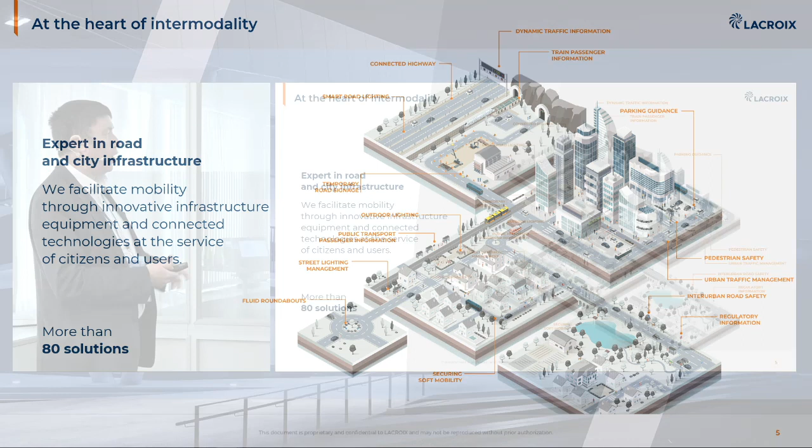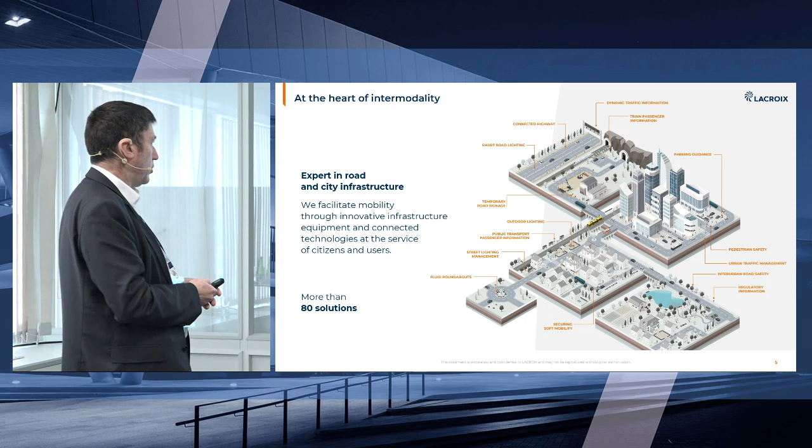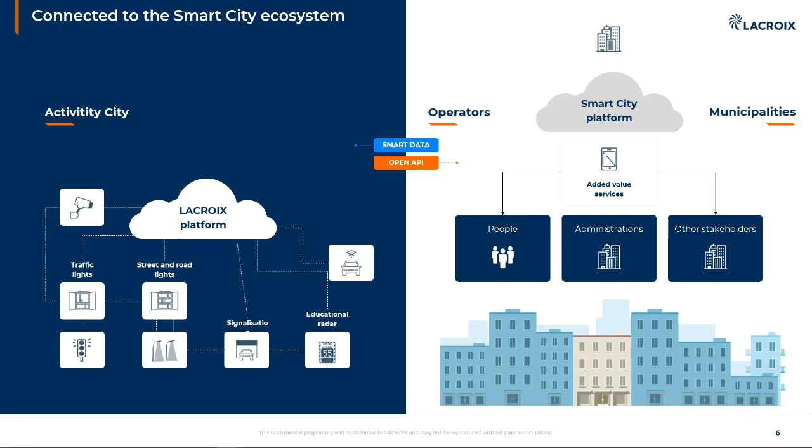And see what solutions we have already available. We are also developing our own platform, which will allow us to use multiple solutions to cooperate. For example, based on the traffic, we can change the lighting, or for buses or emergency vehicles, influence the traffic lights. But this is not part of the discussion today. And of course, this platform, when going to smart cities, has an open API to connect with the city platform, used not only for lighting or traffic lights, but also other types of solutions in a city.

As I said, we have in Lacroix City several divisions. The first one is street lighting, I will come back on the different products we are presenting today. Originally, Mr. Lacroix started the company in 1936 already. He doesn't live anymore, and the Lacroix family is not anymore the owner of the company, and it started just with simple traffic signs.

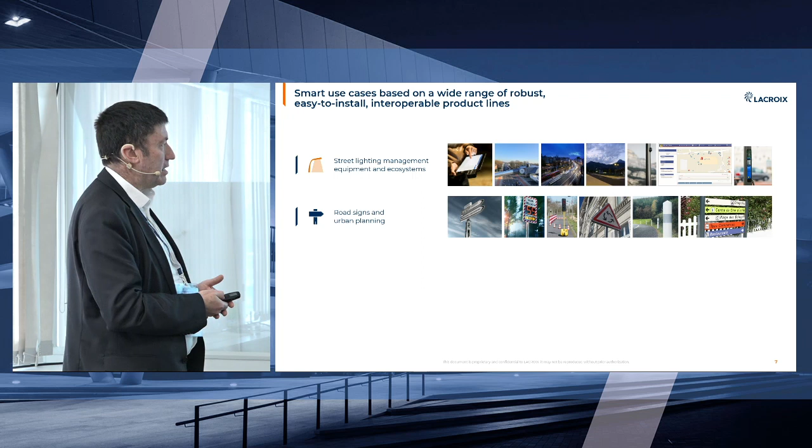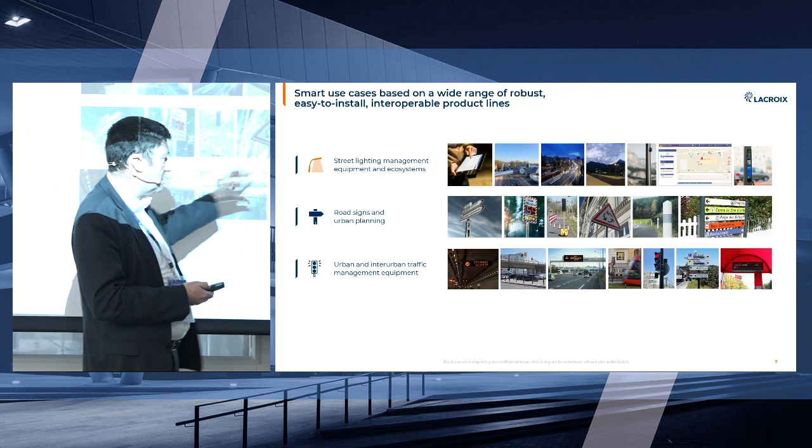So there we have the signs, variable message signs, and passenger information displays. We just have been awarded a 5 million euro project for Poland, for the national railways. With a new line there, modernizing all the passenger information displays will be delivered by Lacroix.

And of course, the second part is everything to do with intelligent traffic lights, where we also have a solution bringing AI. Based on video cameras, we identify how many cars, how many pedestrians, how many cyclists, if there are elderly people. And then we have our connected division built around V2X, the European standard for future autonomous cars, where we can already integrate and broadcast data to other users having V2X, or have live connecting data from roadworks to the signs on the highway.

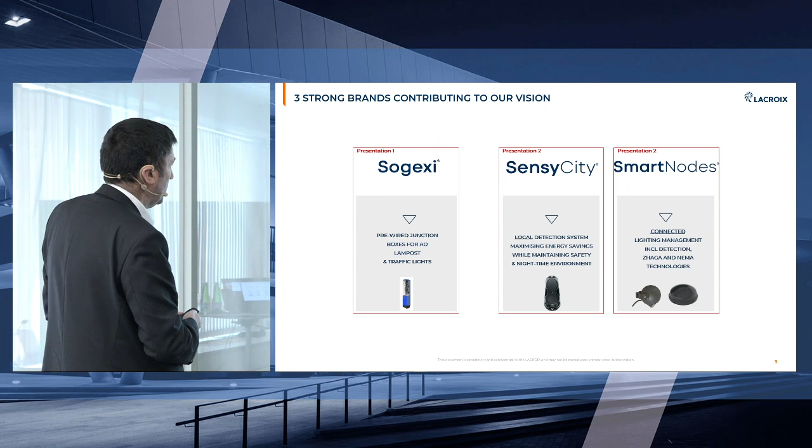But today we are talking about lighting. I have been offered the opportunity to have two presentations, one now and then one after the break. So I will start with the principle of junction boxes, I will come back on that. And then after the break, we are really going to our smart lighting solutions and smart light management solutions.

The first part, Lacroix, everything is on Lacroix but we keep using the brands. So Lacroix bought the company Sogexi, which is based nearby Lyon, about 7 or 8 years ago. And so now we are bringing the principle of junction boxes. It will become clear to you.

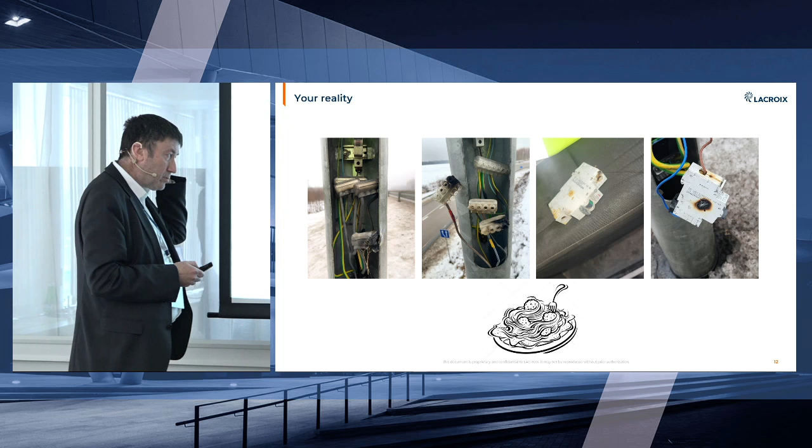I think some of you are familiar with these images. This is the way you install luminaires and lighting on light poles. I call it the spaghetti with meatballs solution. If you open a light pole, you see a lot of cables and a lot of components. If there is a problem, where is the problem?

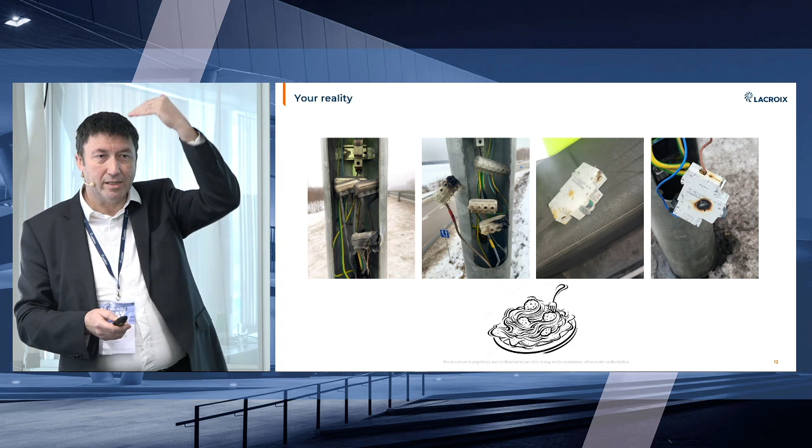And of course, all those components are IP20. Unfortunately, you're living in a country with very big temperature rises, which gives you a lot of condensation. And of course, condensation brings water inside the light pole. And of course, you have a problem sometimes - shortcuts, and bang, broken.

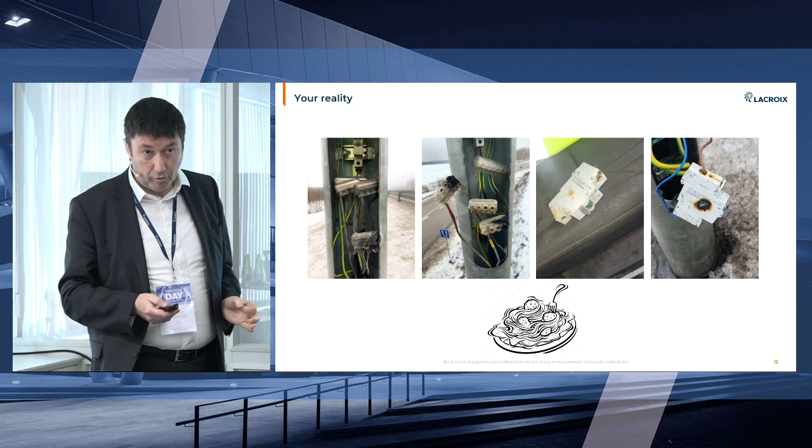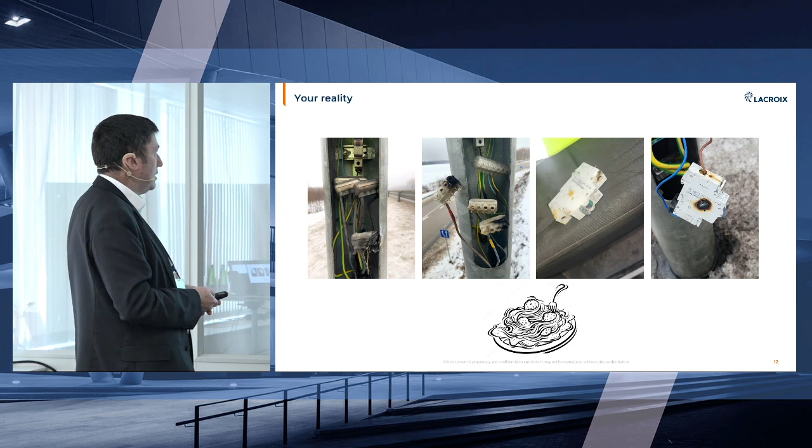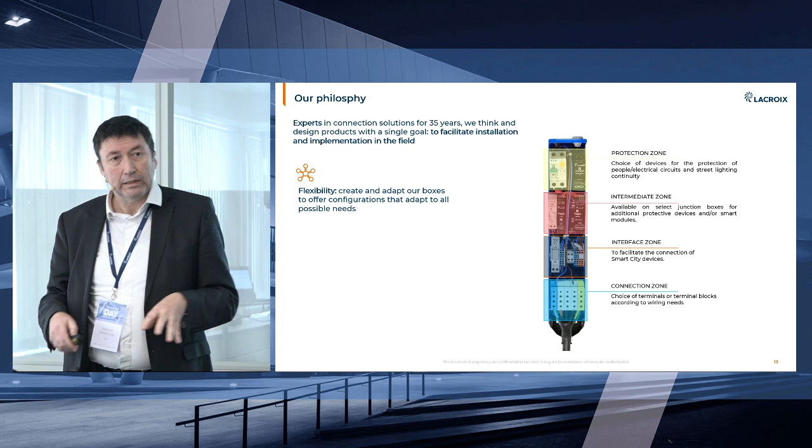So what is our philosophy? For 35 years already we have had this in place: bringing a box which moves from IP20 to IP44, and we even have an IP66 solution, to put all the electronics and connections inside the box.

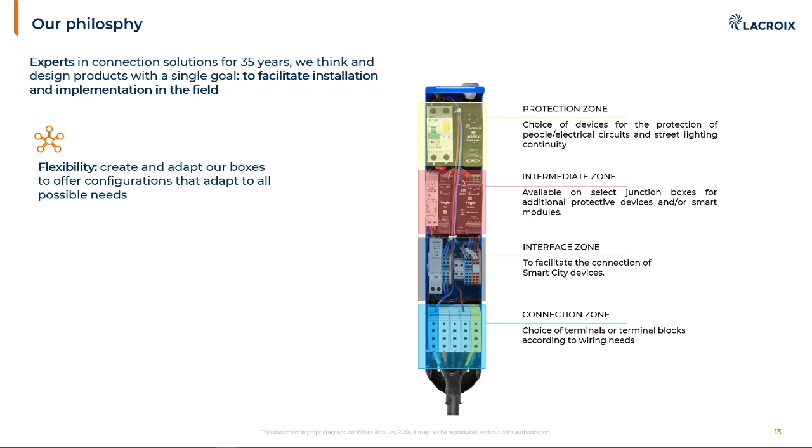That means if you have condensation, there will be water, and the water will go down and escape. If there might be some minor condensation inside, it will not, if you did a proper electronic fitting, cause what you have seen now. Of course, if there is lightning, that means you should have the right protection inside.

So we have it in different varieties. You will see different sizes depending on the light pole - very important, I will come back on that. Some have only 2 zones, some have more. This last one is the Europack, which is really used now for...

There is a trend to go to smart light poles. Cities want to add - where do you find electricity? All over the city, on a light pole. So they want to add publicity panels, air quality sensors, temperature sensors, traffic counting systems, cameras. It's a very good way to do it, but of course it brings the need for some extra protection to put inside the box.

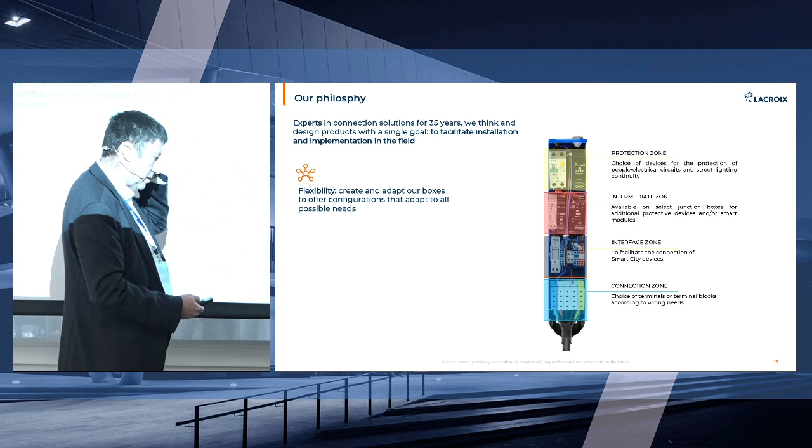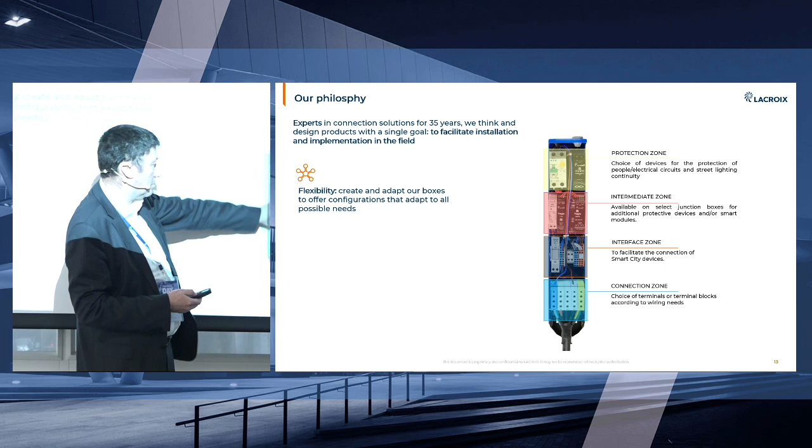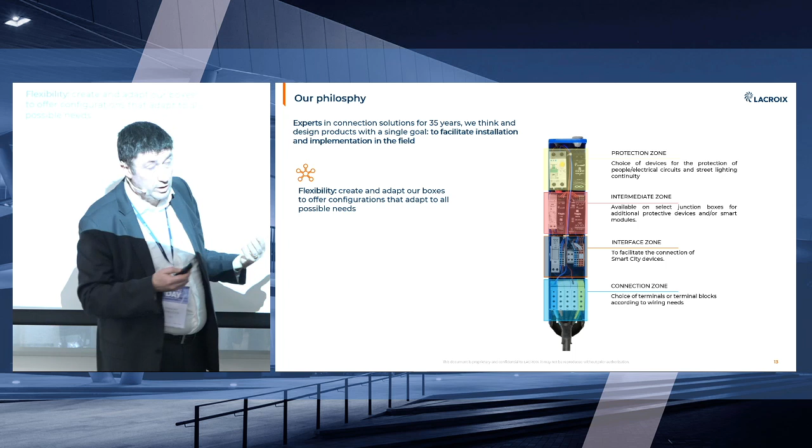And that's why we always have the connection part. The power cables come in from the bottom, it's connected, daisy chained to the next light pole, of course. And then part of the power is taken to feed, at the end, the luminaire, but also all the other equipment inside, including a lot of control equipment and protection of different types of devices, including luminaires attached to the light pole.

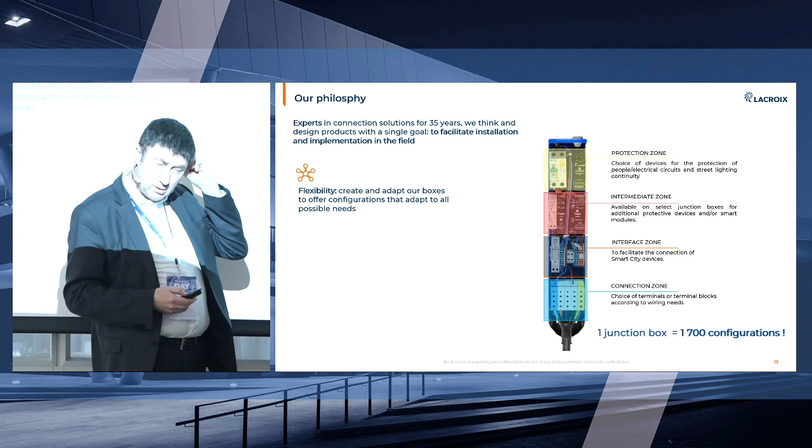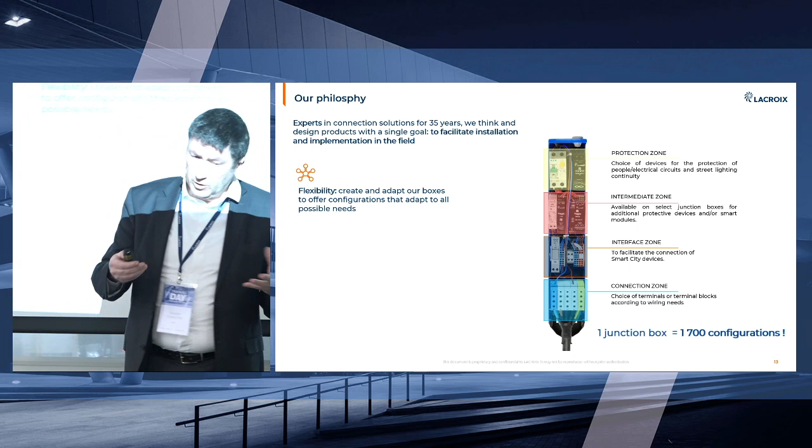So we have built, until now, very big quantities. In total, we have about 20 million of those boxes already installed in the world, in 1,700 configurations. So we can offer you a standard solution, but if you have used some special component...

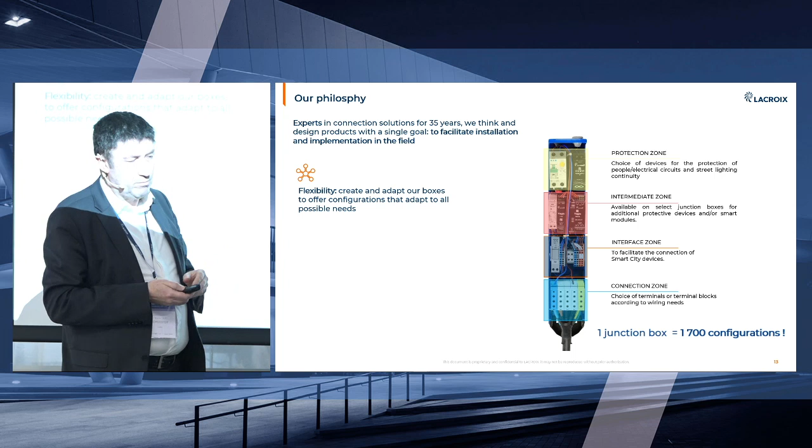We started to work with Lucidus last year, and we had the first small project where we used 2 boxes, because they had a very special driver to connect to 3 luminaires. But the light pole was too small - I will come back on that. So we put it in 2 boxes connected to each other. The lower box has all the protection, and the higher box, which is connected, has the special device to control the luminaires.

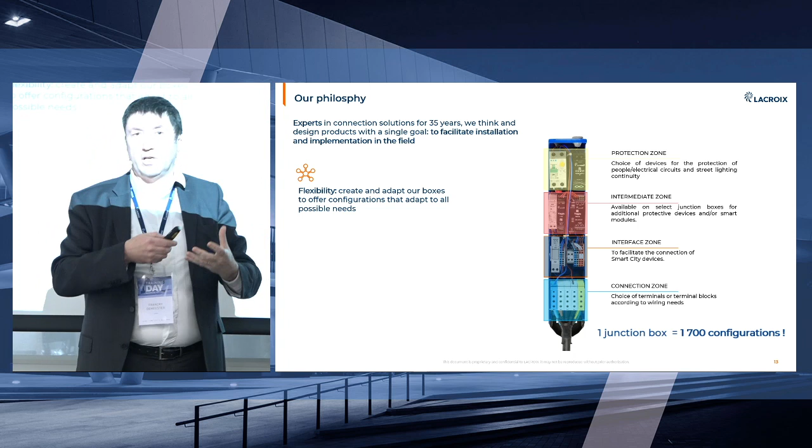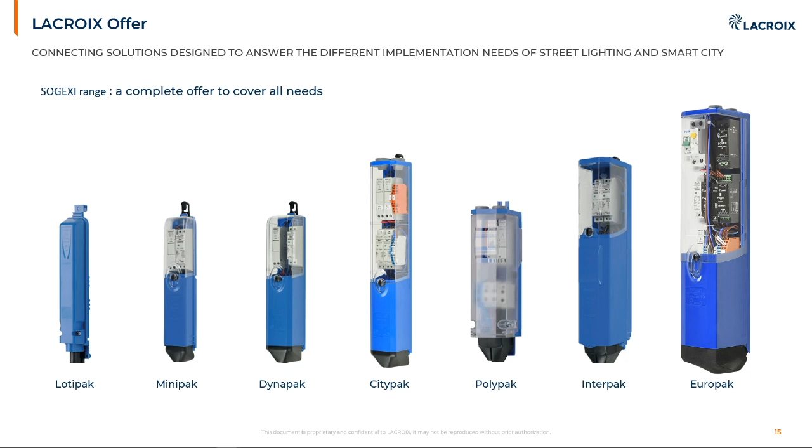Now, you see, we have it in all types of size and width, depending on what you want to put in, depending on whether you want automatic surge protectors or manual ones. This also comes, of course, with the dimension, and this defines the dimension of the box. So we have many different types, and it's up to us, to you, and to Lucidus to discuss what are your needs.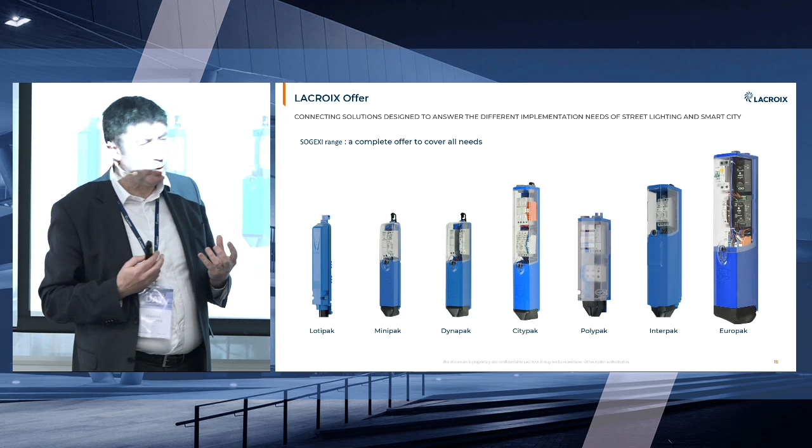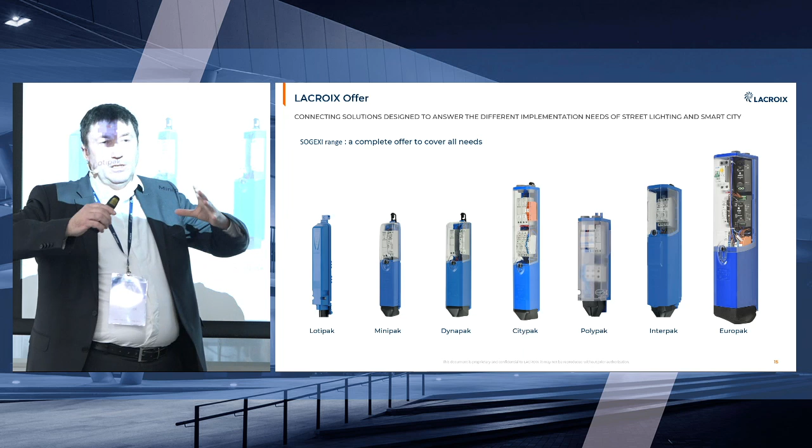For people considering it, it's slightly different than what you currently do as designers, because if you have a light pole, it's useful to think about what you want inside for protection. I often get, for example - I did a project in Finland for a new tramway, but the light poles were so small, we didn't get the box in.

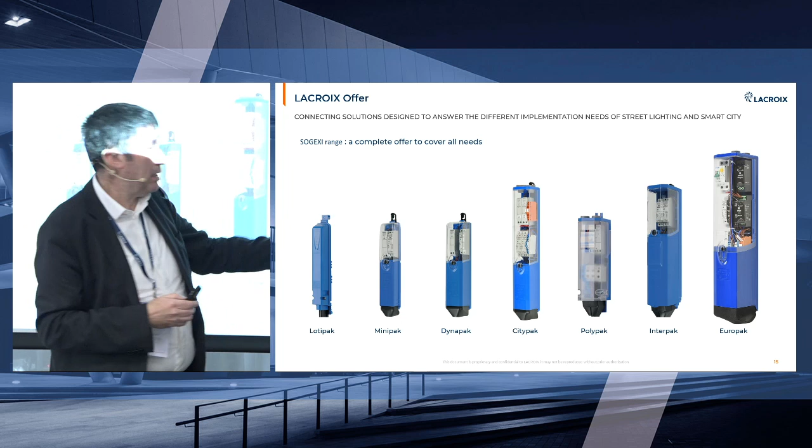So that's why you can specify it should be 10 centimeter, 12 centimeter diameter. It's important, if you want to use a smart light pole, to take into account what will be the dimension of the light pole, because based on the equipment, it comes with some type of dimension.

So what is very important is 3 different parameters. First of all, what is the inner diameter, because the box has to fit in. And of course, what is the door - there is a control window at the bottom of the light pole, 1 or sometimes 2. Of course, the height and the width, we have to be able to slide it in.

So this is an example. You can see them later on, so you can easily open them.

And then you can see here, of course, this opens too for the installation, but then there is a control window also inside where you can use it. But so it's very important - based on the light pole, we will be able to offer you different solutions, but it might offer you limitations to the type of equipment you can bring in.

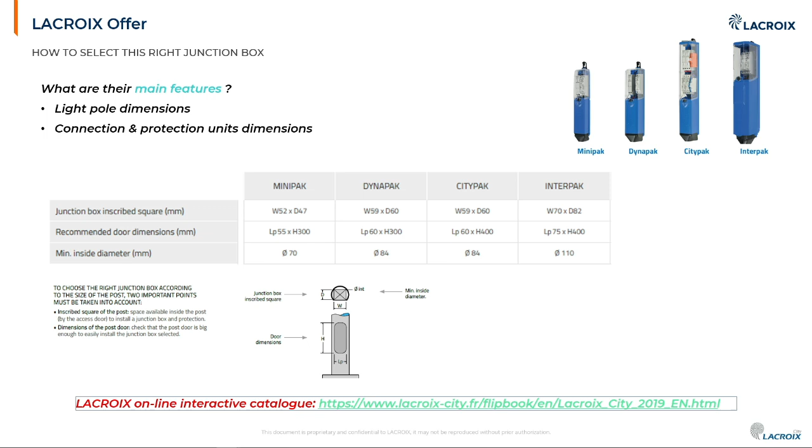So we have a very nice online interactive catalog. You can go to the internet, you will see all our offerings, and there you can learn a lot about junction boxes - it's very well specified. For example, one of the pages shows what we have - different products. You will see there is more than just street lighting boxes.

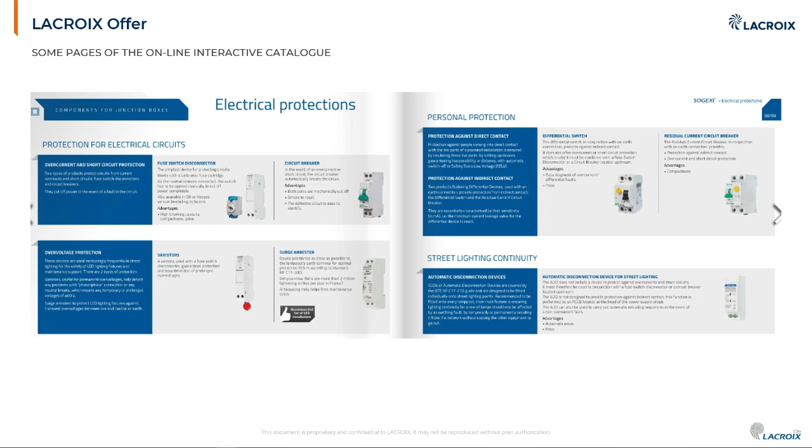Here you see the next page - it's difficult to read, but it's mainly the important point: what type of protection would you like to build in inside that box? Is it electrical circuits, personal protection? Is it against lightning? Or is it some special product? So all can be built in, but all, of course, comes with a dimension on depth and width. So this is all specified over here.

And then, for each of our products, there is a very nice product sheet where you can see what are the dimensions I need, what type of cables can I get in, can I get out, what type of connectors can I use, and also what type of protection can be built in. So if you say I want that, we also have the sheets reversed - if you say I need this type of protection, it will show you, then you can choose out of these boxes.

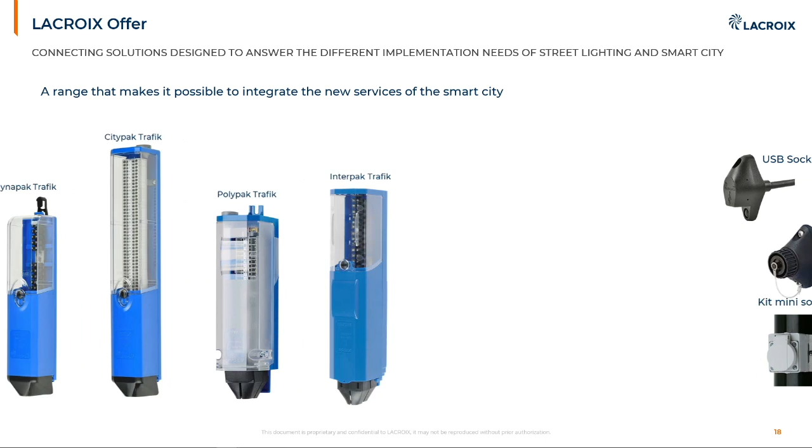So we not only have products for street lighting, but also this type of boxes are used, as I said, in Denmark and to the south of Europe, or used also for all types of traffic installations - being traffic lights, being tramways - where then we have different requirements, because then you need a lot of connectors. Sometimes it's 32 cables for a big junction. So this is on the traffic side.

And then, we also have some other products, which already are being installed in Latvia. This is our USB socket. That means you can install that on the light pole in the city center, and if somebody next to a bench wants to charge his smartphone and the city allows it, you can plug it in and take the power.

So this is one of the third-party services that we are offering. We have technology in which we can enable and disable it, and we can even measure the power that is used by the luminaire versus what would be used by this. Because for a streetlight manager, typically he is responsible in his budget for the streetlights, but he is not very keen to add all these third parties because they consume electricity and he gets the bill.

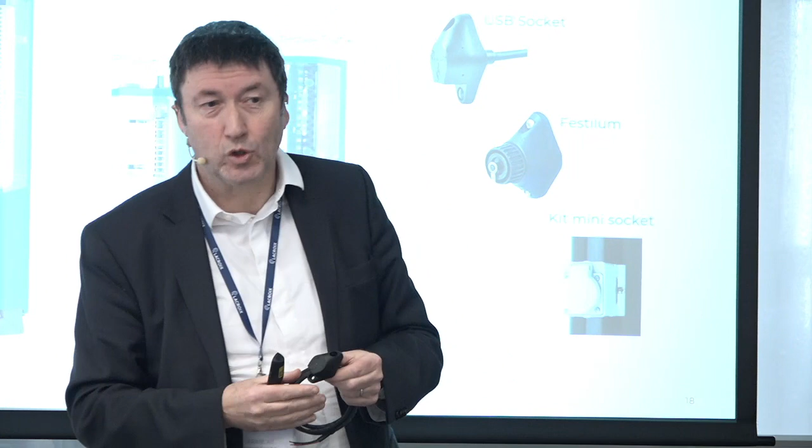So if the current trend is now electrical bike charging added to a light pole, this is, of course, consuming more. So we have other technologies to relay and cut the power between this and this time, and also to say how much was consumed by the streetlights and how much was consumed by the third-party solution.

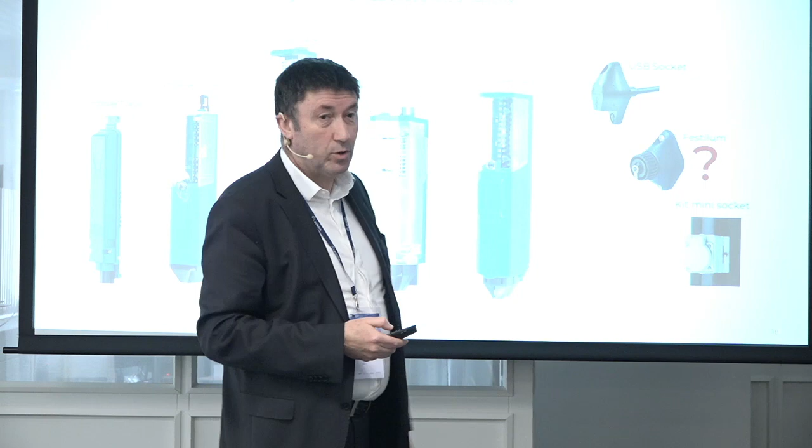And then we have the next component, which is what we call the Festilum. I think some people know it because I had last year a very big order from Estonia to sell that. So anybody has an idea - you have to mount it like that. This is in fact mounted on site, on the light pole. Okay, I have to screw it up.

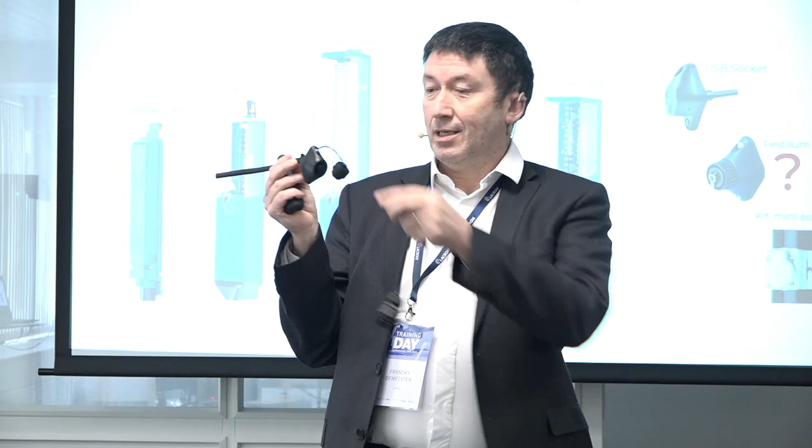Anyone have an idea what it is used for? And you're very fond of it - Christmas lighting, correct. It's a very nice system to have Christmas lighting. Thousands were sold in Estonia last year. You just mount that - during the year, you put on the cap, and then when Christmas is there, you mount this at the end of the cable from the Christmas lighting.

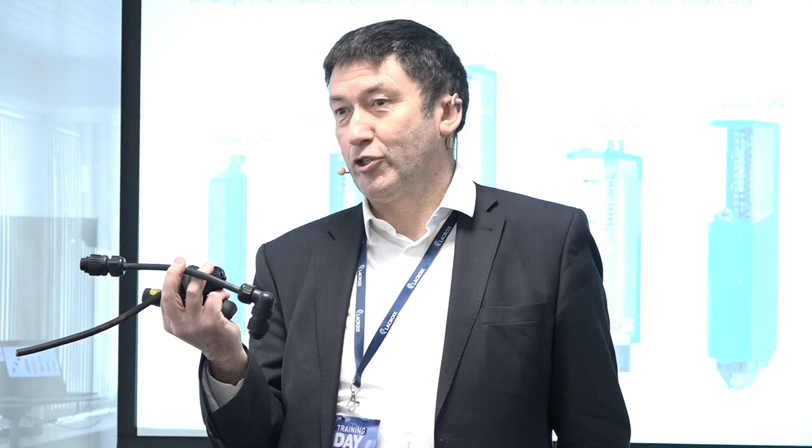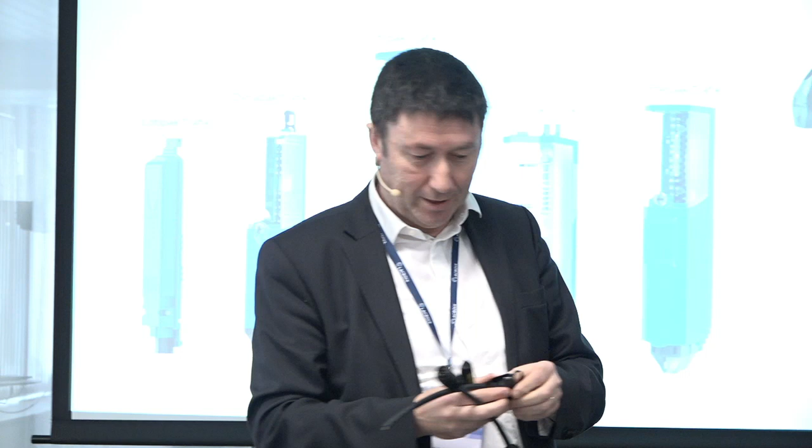And you have two versions - a straight version and a 90-degree version - and you just connect it. So during the year, I see sometimes very ugly constructions to attach Christmas lighting, but this is very convenient, and in your areas, it's very popular. I don't know why, but in Estonia, there are thousands of these being sold and installed.

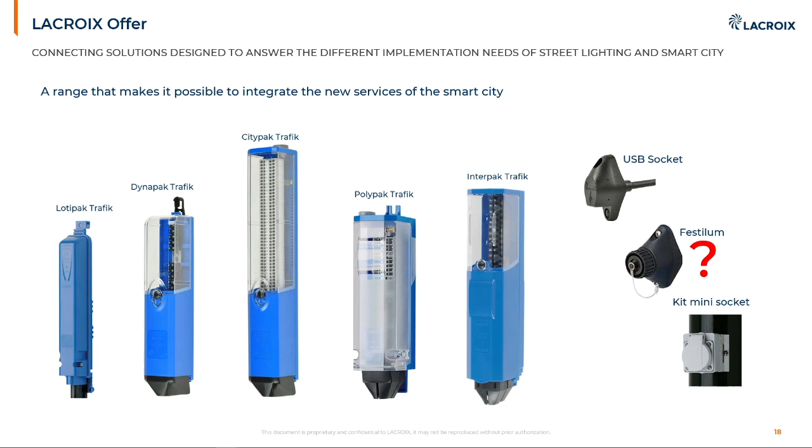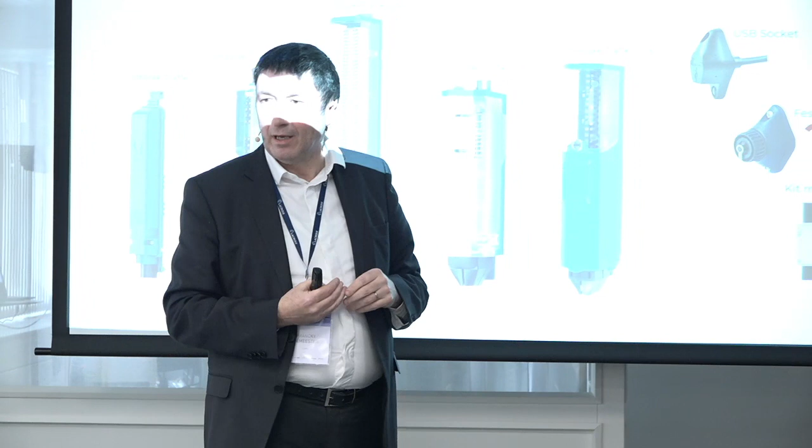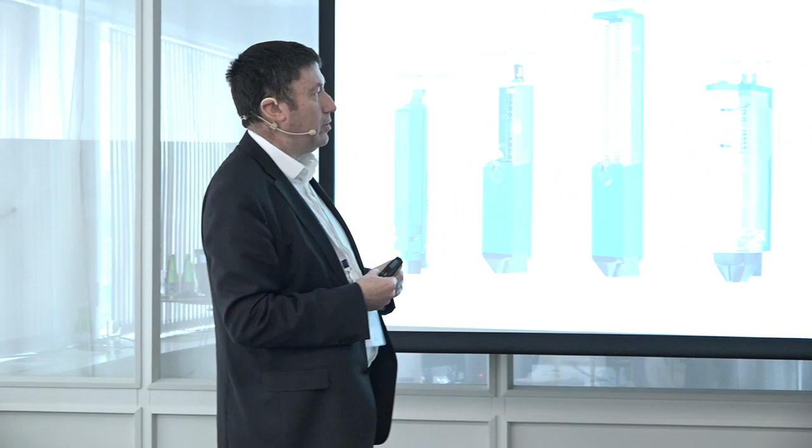And then also we have what is also used in your area a lot - what we call the mini socket. It's a kind of socket that you mount on a light pole, where it is possible. Let's say that's the old version for the Christmas lights, where you just plug in a standard Schuko or whatever plug inside. Of course, it's better like this - this is more watertight than the standard product we have with the mini socket. Of course, the mini socket allows other things too - if you would like to have a traffic camera, for example, you could connect it for power.

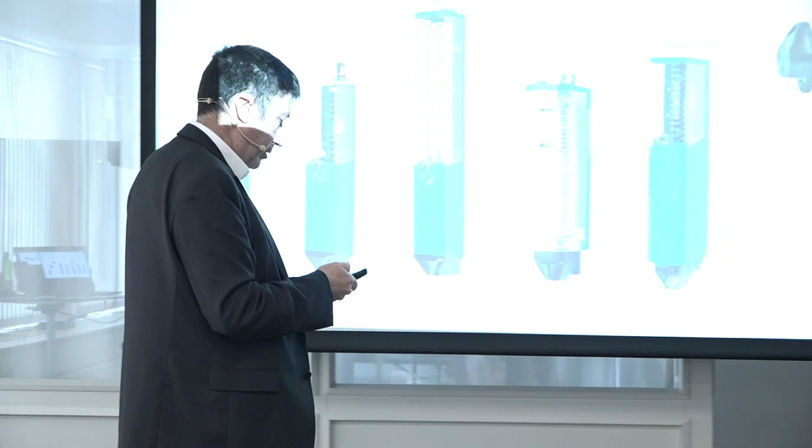I think I went a little bit fast.

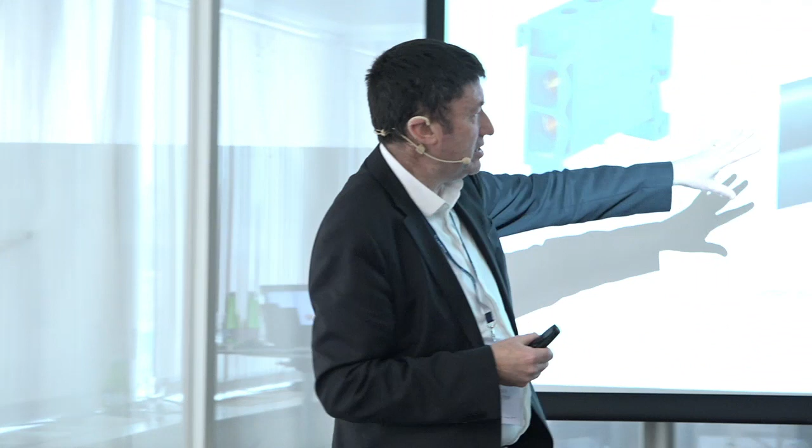Not only do we have the boxes, we also have different types of connectors based on the cables you're using, from 10 square millimeters up to 35, also 50 is possible. We have different connectors where the power cables come in, partially daisy-chained to the next light pole, with part of the power taken off. We developed a technology that electricians don't always like, but it's very secure, unlike clip-in solutions where you're uncertain about the contact. For the different cables we have different connections, and then this goes out.

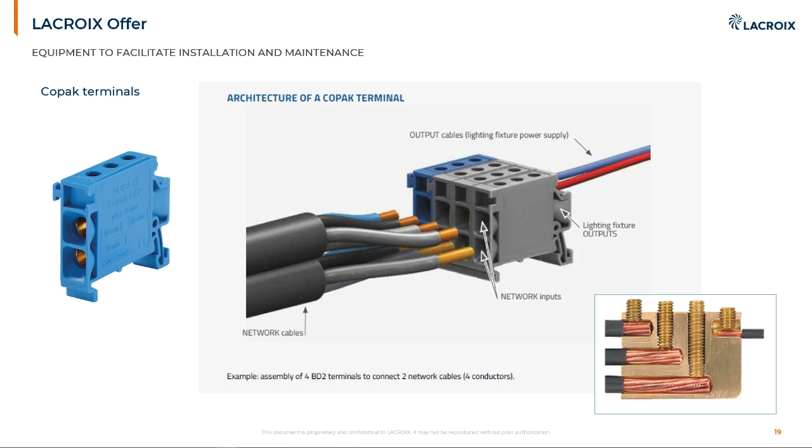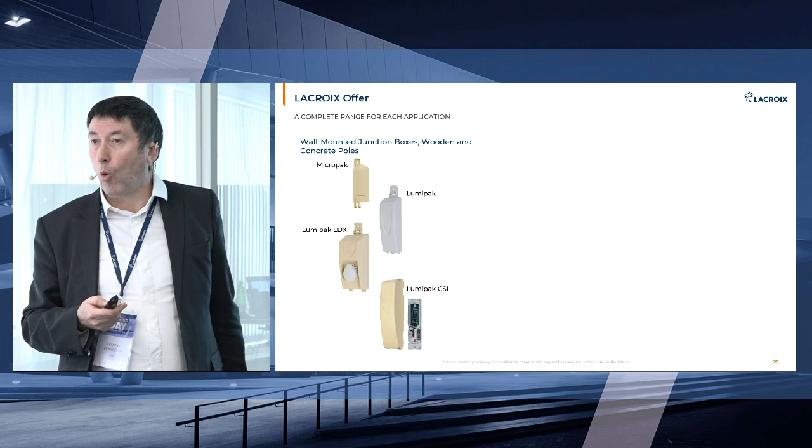We also have a solution if you would have wall-mounted lighting. Sometimes in the city not all lights are mounted on a light pole - sometimes they are mounted on a wall. So we also have a solution there where you fix it to the wall, and then again you put the power cables and branch it to the luminaire.

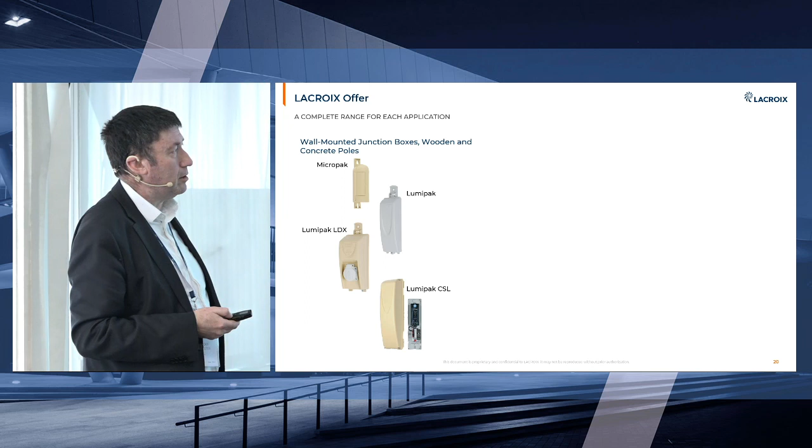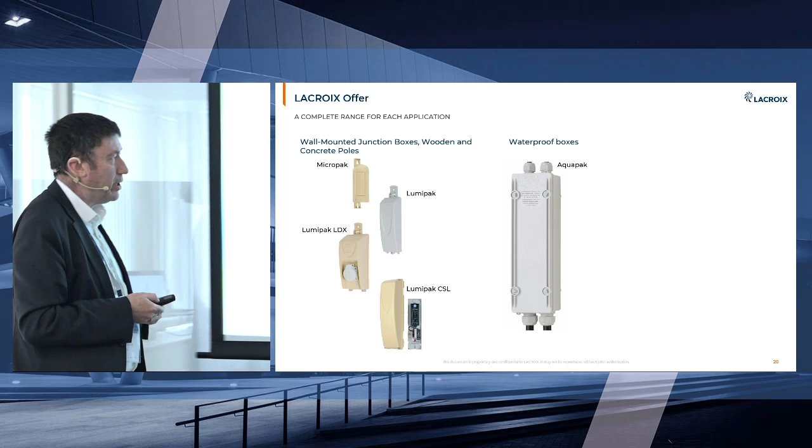We really want to facilitate installation first and foremost, because this comes completely pre-wired from our factory. The only thing you have to do is put on the power cables and connect the luminaires or other equipment you'd like to attach - traffic camera, traffic counting device, light panel, or electrical vehicle charging installation. This is all pre-equipped, so you save a lot of time not having to go on site and do all the wiring.

Of course it's also done on a production line, so we have our own test benches. When the box has been completely assembled, it's powered, and a computer program checks that what comes out is what you expect when you put in power. And then of course it's delivered.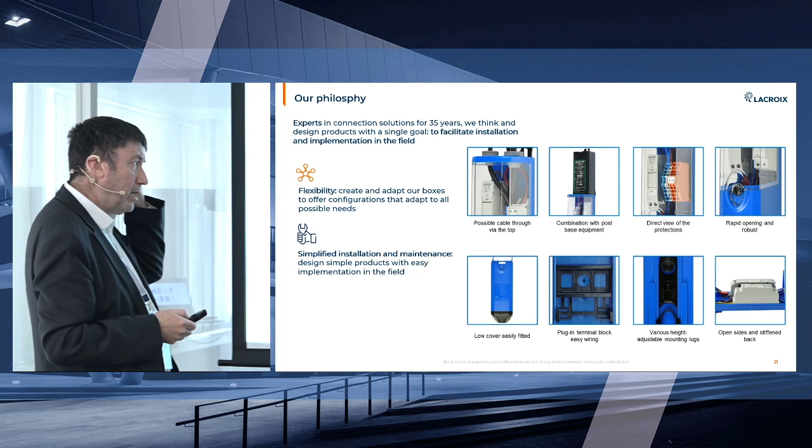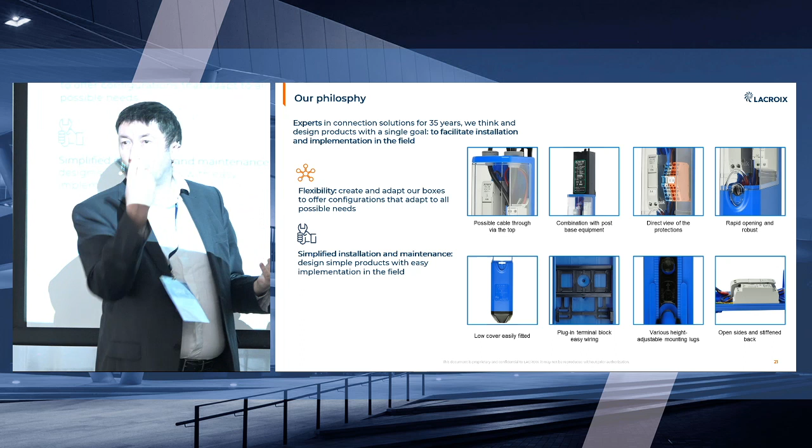Now, the problem is sometimes the electrical components - with the crisis, some components depending on the solution you're selecting might take some time to get awarded. We can put cables via the top or via the bottom to go out, though normally all power cables come in from the bottom. We can combine it with other equipment, and we have our own drivers - for some installations, the driver can even be programmed with an app.

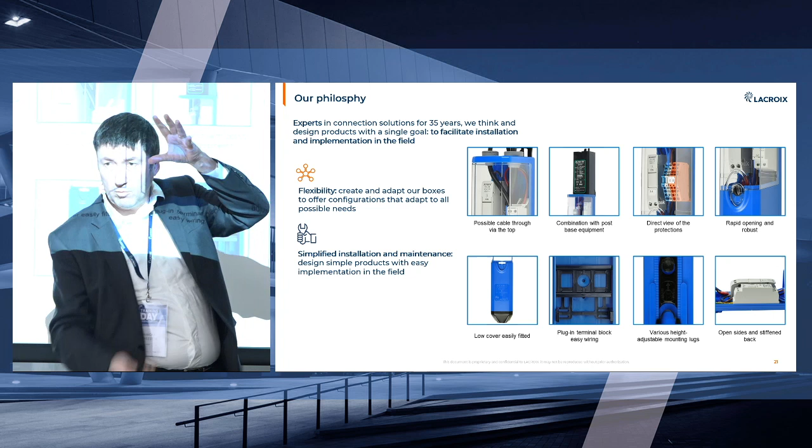You see that we have this transparent cover. Some are more than the others. We even have a possibility, but people like it, but only few people buy it, to have a full transparent cover. But it's more expensive.

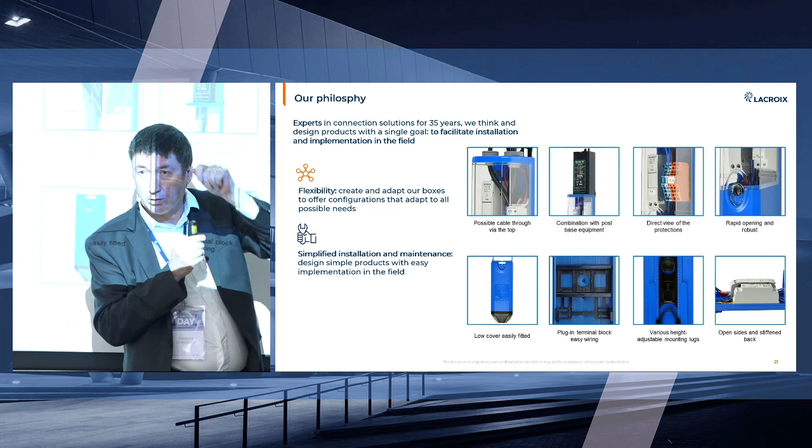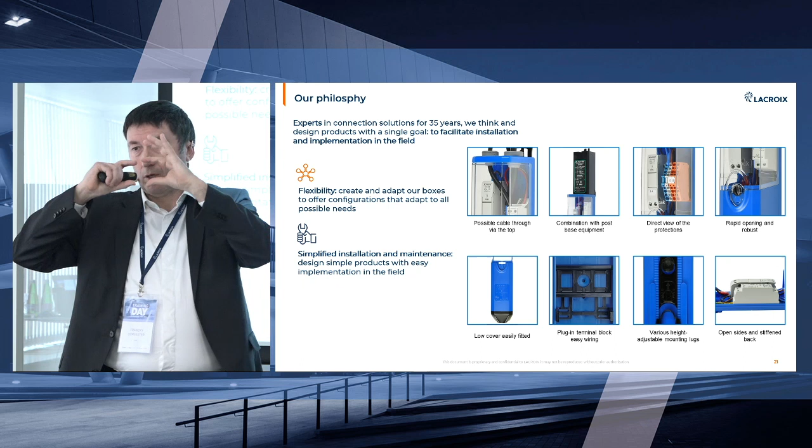So then people, mainly we have the transparent parts where really you have to work if there is a problem. But as I said, having it mounted, you will see, in every light pole here, also in the Baltic area, you have what they call a DIN rail. So it's connected to any DIN rail, which means your light poles are already prepared to use it, if of course they have the right dimension and the right opening.

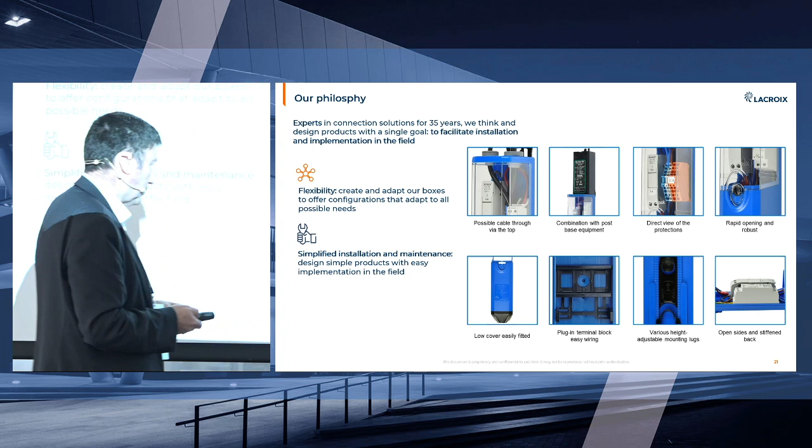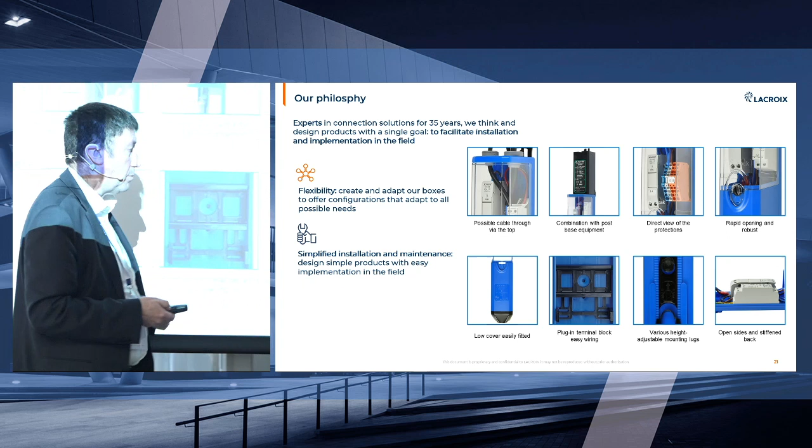You see also it's a very rapid opening. You just screw it, and then you can start measuring where is the problem. So you see this is the internal fixture, and this is the outside for the DIN rail. It's also possible to replace components if needed. So it's very flexible, it offers you a lot of possibilities, and we can discuss with you what are your needs.

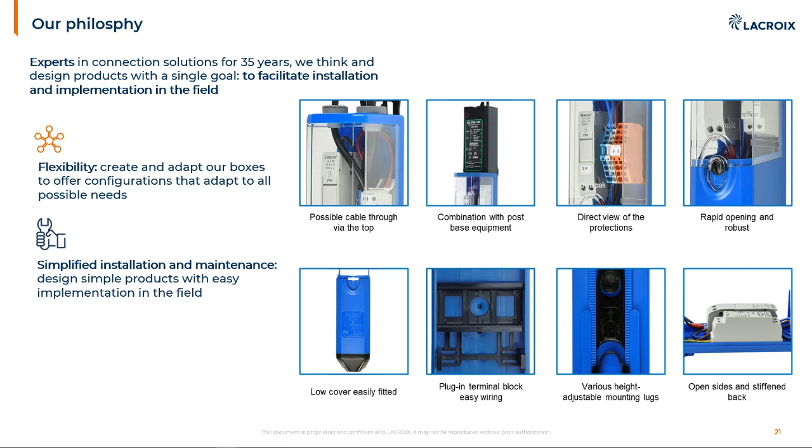We have already, as you see, some samples over here. If you would have a dedicated project in mind, discuss with Lucidus what you want. Please verify what are your light poles that you will be using. We could offer you a sample just to see what is it now and how does it fit.

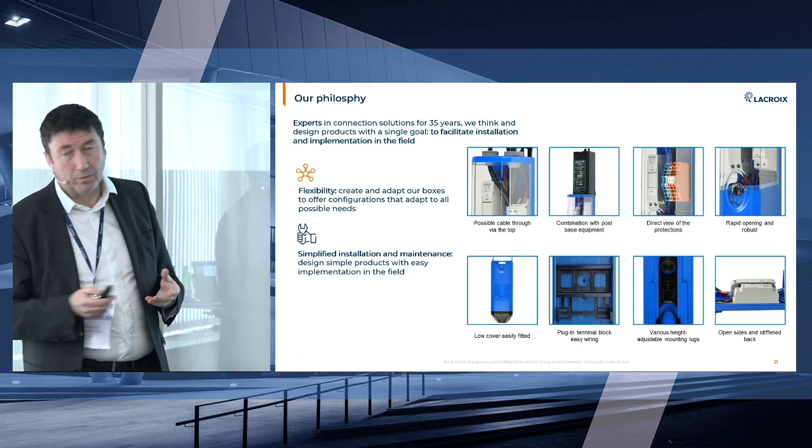So I think, as I said, it's standard, obligatory from Denmark to the south, but it's something that in the Baltics and the Nordic countries is coming because they see a lot of advantages.

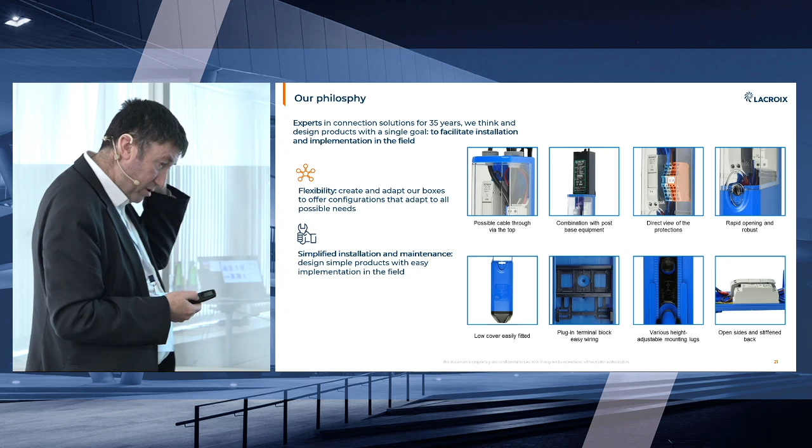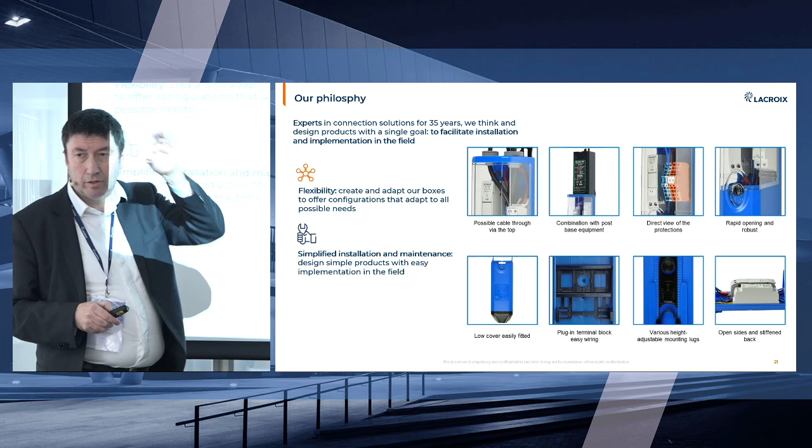There has been a study from Trafikverket in Sweden where they had a recent installation and had unexpected corrosion on the light poles. The paint was good, it was no problem, but they saw that due to this other construction there was current leakage, so it cost you money. They discovered that in fact they had electro-corrosion because the current has to go somewhere. And where does it go? To the ground, of course. But then you have electro-corrosion, it's sparked very slightly, and the paint was damaged.

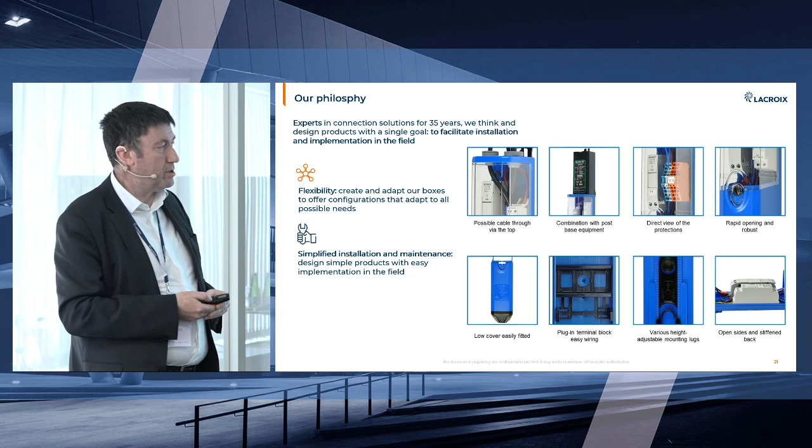Of course, here you have a lot more protection against water coming in, condensation, and current leakage. This caught the attention of Trafikverket, so it takes time to introduce it, but we are very open.

So we have a few questions from the audience. First one is, which countries mostly use these boxes in Europe?

All countries except Baltics and Nordics, because it's obligatory. There is a European directive prescribing you should even use class 2 boxes. I think everybody uses it in his house, all these plastic protections. This is class 1 because it's used inside. There is a European directive specifying class 2, and we are fully compliant with class 2.

So to have class 2 in the light poles, it should be equipped with this box. It should be, but for some reason I thought you were a member of the European Union. But okay, don't worry, just also rumors. Other countries like Sweden and Finland escape making it obligatory.

One more question: what is the failure rate with the junction box compared to the old installation? With the junction box, what we have seen is that there are very few failure rates. The main failure we see is if there would be water rising from the bottom. If you would have a flooding from the top, it's sealed.